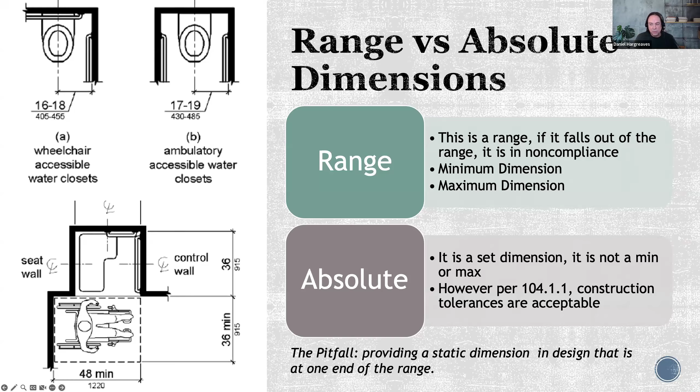So the next part is clearances and reach ranges. You can see when one organization's work conflicts with another - an existing accessible ramp, curb ramp - and the city at some point said we need parking meters every 20 feet, and it landed right in the middle of the ramp. So post-construction changes can also create a challenge.

But let's talk about those clearances. First off would be your clear floor space. Now I'm basing these on the ADA. Any of you familiar with the latest ANSI? They are increasing some of these numbers, and I do have another presentation on that. But for now, this is the US civil law, and these are your minimums.

So you can see here, your clear floor space, when your wheelchair isn't moving, is 30 inches by 48. And then objects above 27 inches can't extend out from the wall greater than 4 inches.

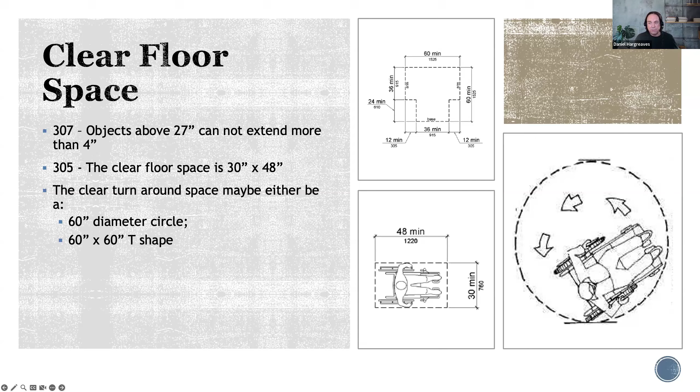So the idea there is if you're tapping with a cane, anything 27 inches and below, at any projection - so think 2 feet high, something that sticks out a foot - a cane would tap it and they would be able to walk around it. Because always remember, we see a lot of illustrations from the accessible symbol, a person in a wheelchair, to a lot of the graphics, people in wheelchairs, even the turnaround circle. A lot of that is what it's based on, but there are other disabilities that we're trying to capture, from hearing to visually impaired. And so all of those different elements are applied.

You can see here with that reach range, as we were kind of talking about, if something projects out - when you're in the wheelchair, you can see the front approach, you've got 15 inches to 48. And an older ADA, on the side approach, used to allow you to go to 54 inches, another 6 inches higher. But they've now changed that - it's all at 48 as the max for the top.

And one of the big pitfalls that I always catch on that in my own construction projects is thermostats. A lot of them are LED these days, and people want to mount them at about 5 to 5'4", which, you know, at a 4-foot high reach range is out of it, even though it works great for those that are standing to be able to see it correctly. So it's just one of those small elements that usually gets overlooked.

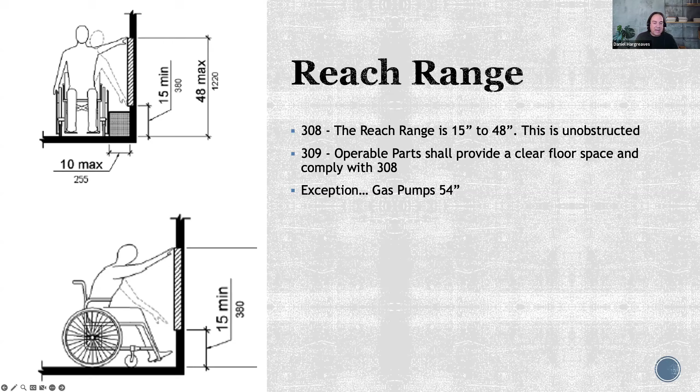And that's where 309 comes into play, saying the operable part shall be in the reach range, 15 inches to 48 inches. So if you had a thermostat where the buttons were at the bottom, mount that part at 48. A lot of times you'll see where they'll either center it or put the top of it not to exceed - it's just the operable part that matters.

And like any other good code reference law, there's an exception, and that's gas pumps. From a safety standpoint, they've found the lowest to be able to put a gas pump is 54 inches above the ground. And so they actually get to be outside of that reach range.

So let's kind of talk about parking once again. One organization, i.e. the electric company, wanted their pole right there, and they cut a new hole in an existing parking spot. So always have those coordinated.

This is an interesting topic, van versus standard spaces. And you'll see in the code, if you only have one space for your parking, it should be a van space. Van is wider than a typical space - that's 132 inches or 11 feet wide. And then a standard parking space is 96 or 8 feet wide.

The reason being is a lot of vans on that side door will have a lift. So the person in a wheelchair may get out of the driver's chair, wheel back, and then get out on the side of the van. So that's why the extra width there.

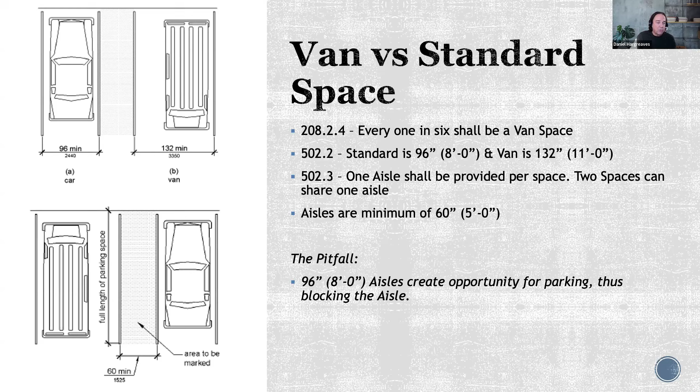One of the things to remember about both the standards with the illustrations, they have a disclaimer in the application that the illustrations are for reference only, but the written part of the code is what's enforceable. So the graphics are good, but especially in the older standard, there were some conflicts between the graphic part of it and the written part. So I always go back to deciphering what's written.

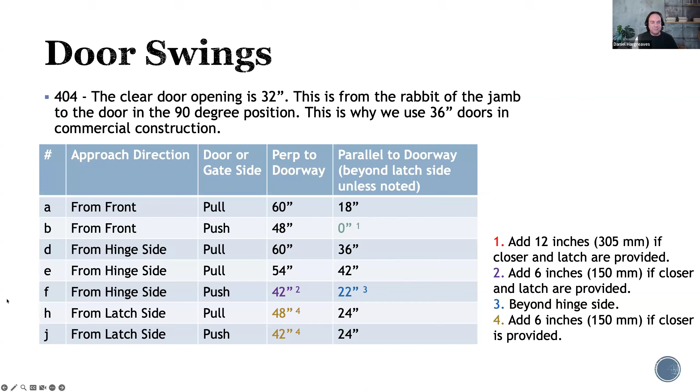The next slide will really show those different approaches to the door. And these are the same illustrations you find in ANSI or the ADA standard. And you can see right there on a front approach, 18 inches. And the idea is that clear space covers the wheelchair, lets you maneuver, lets you crack the door open and back up and move forward and so forth, and that's how you can progress through the opening with the door there. From a front approach, it makes perfect sense that you can roll right up to the door, turn the handle, and keep on rolling right through.

So the idea with that latch and closer, and that's this illustration with the red around it, is that door will keep closing and latching before the person can move forward. So that extra 12 inches lets them get the wheelchair at an angle, and then they can unlatch it and use the kick plate to hold it open for a second and then finish getting through the door.

And then also, once again, whether you're approaching on the hinge side, and a lot of these conditions may be where the door falls in the room, or on the strike side, you'll have those different clearances really depending on the approach. And once again, as I noted before, the pitfall is either caught or overlooked. You do a front approach with the clear 36 inches and you've got a latch and a closer, and that 12-inch clearance to the side has been missed.

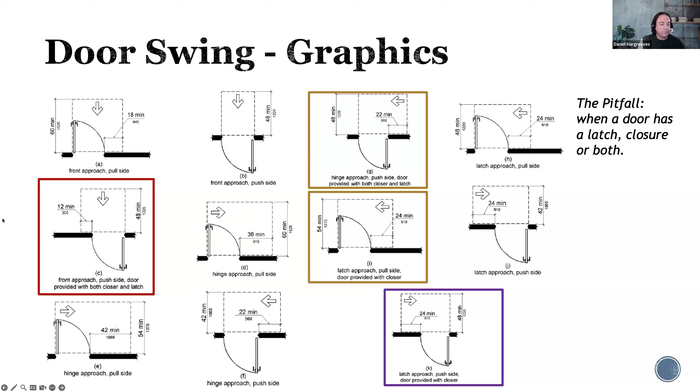So some of the other elements of a door that can help, and that's identified in the ADA, the closing speed of the door. If you've got a closer on it, that last 5 seconds, you actually have to hold that door at 12 degrees. On all your interior doors, you need a pull force of 5 pounds. And ironically, a fishing scale works great for that. And there are accessible tools also for pushing and pulling on doors to see what that force is.

But that of a storefront door, if you have a narrow or even a medium stile that's under 10 inches, you've got a little lip there, or maybe even more of a classic raised panel door. The reason for the 10 inches: that foot pedal on a wheelchair can get caught on that lip, and then the person can't get through the door.

And then vision light. And this is always one of those things. Not every door has to have a vision light; a lot of times you want it to prevent accidents. Maybe it's a high traffic door in a corridor, or between an office space or something. If provided, the bottom sill of that is 43 inches. And I always recommend when you do that, make sure you coordinate the bottom sill of that vision light of the door with the hardware.

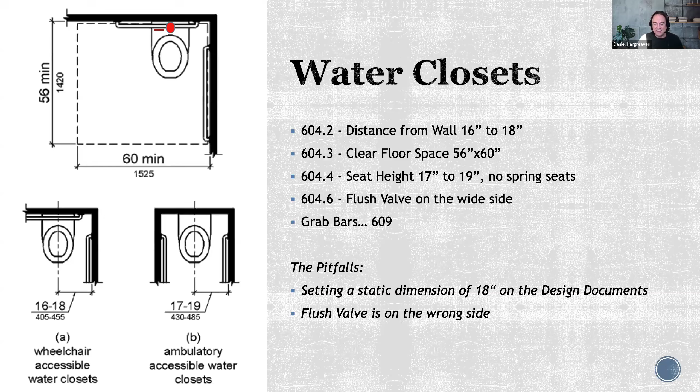And you can put the range in there too. A lot of times if you're working with Revit, or even CAD for that matter, it's a static number that they give you. So I always recommend just pick that static number.

The grab bars at your water closet, you've got the sidewall. So you need a 42-inch bar, and then the minimum distance to the leading edge is 54 inches. And then also at the same time, the maximum distance from the corner is 12 inches. So you can actually use a longer bar than 42 inches. And you can exceed those. You can be closer to the wall than the 12. You could be all the way down at 6.

But then also remember, if you do that, then you need a 48-inch long grab bar to make sure you hit that 54. So take all those dimensions into consideration: the length of the bar, how far it could be from the corner, the maximum distance from the corner. The back wall is a little different, and this one has changed from the previous. It used to be a static 6 inches from the inside corner, but now that they've put water closets in a tolerance, it's now based on the center of the water closet.

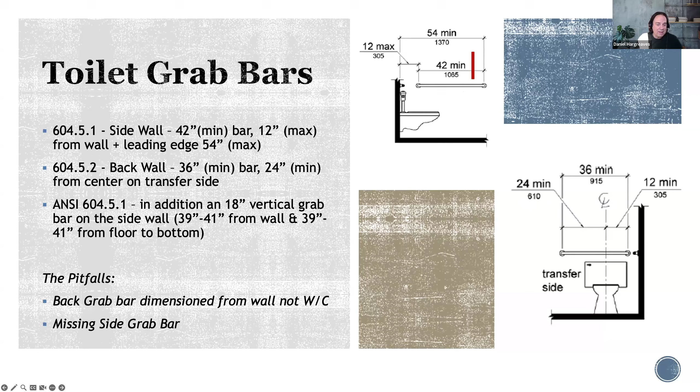And then, as I started to talk about earlier, the two major pitfalls: that back grab bar is measured from the corner of the wall, not the center of the water closet. And then if you do fall under the ICC or IBC for your code, that side grab bar is missing, because the only standard you looked at was the ADA. So that's a pretty common missed item, that side grab bar, because ADA doesn't have any language related to it.

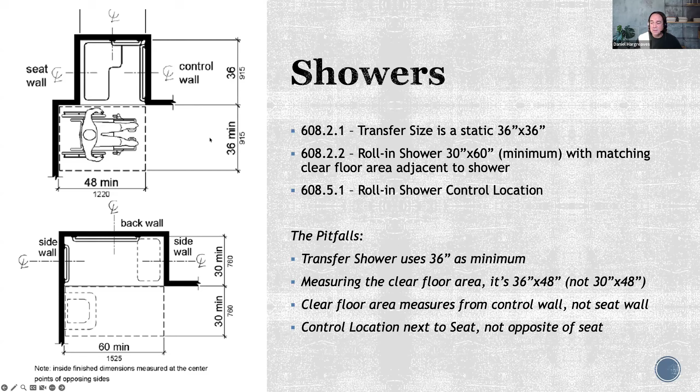Kitchens versus break rooms. Kitchens and kitchenettes are identified in 804. The exception: it is not a kitchen if you do not have a cooktop or a conventional range. That is the main difference. Once it becomes a break room or kitchenette, you don't fall under a lot of the same requirements of a kitchen. And once again, the major pitfall of that difference is that 30-inch workspace. You need an additional knee space for that, which in a kitchenette or break room you don't need. You're allowed that parallel approach.

Kitchen clearances are measured from the counter, not the appliance faces. Basically what that's illustrating: your range usually extends out the width of the handle or the door beyond that 24-inch counter. And if you swing back to those clearance requirements, if you have 24-inch base cabinets and you want the backsplash and the lip, you may have a 25-inch countertop. The problem is a 25-inch countertop exceeds what you're allowed for that reach range. So always keep in mind that projection beyond the counter face.

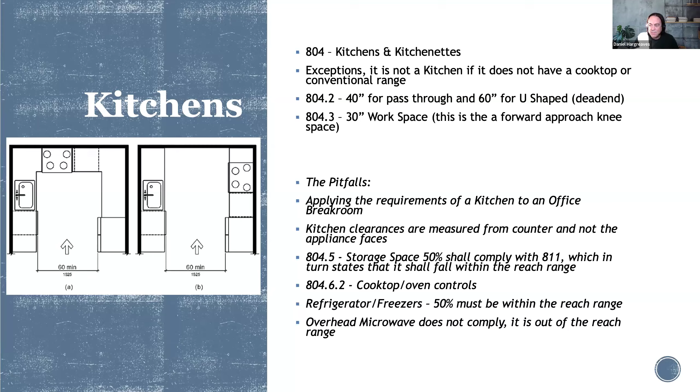And then the last one is a microwave hood over the range. It doesn't comply. So if it is a kitchen and you're having to provide a microwave, you need to either put it on the counter or a lower cabinet in the countertop.

Signage is kind of interesting, and I read in the news that the U.S. State Department is changing, which is kind of in violation of accessible signage, all standard fonts from a sans serif to a serif font, Times Roman. That's actually a pitfall in your signage. So the U.S. State Department is going to be in non-compliance with their own laws. So just keep an eye out for that.

But if you have a static word on your sign, office, in this case library, area of refuge, you have to also provide the Braille. There's standards for the grade 2 Braille, but if it's one of those signs where maybe it's just a static number and then you have an open paper slot to put the person's name in, you don't have to change the Braille out for that because you've already identified it by a room number, and the number would be in Braille.

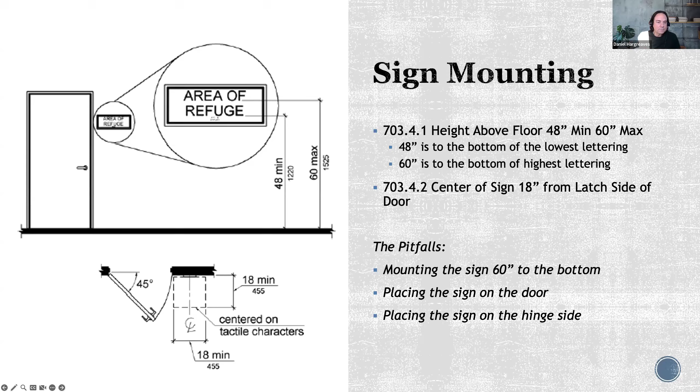And of course, if you can catch your pitfalls in your design, the good news is we get to head to the left for success. If you're following what you think is the correct approach and not back-checking all of those different codes from local ordinances to states to ADA, I always hate to say it, but without catching those pitfalls, you're not going down the right path.

And with that, there's my old contact information. Some of the resources that I pulled all this information from: the access-board.gov, that's a great place for the standards. And then of course there's Title 24, and the Texas Accessibility Standard.

As I said, there's about 30 different states now that have some sort of accessibility requirements. Check your state, check your local ordinances, check your laws to make sure that they haven't added something that may not be in the ADA.

And with that, the downstairs toilet is closed, so please use the upstairs one. And there is no elevator.

Thank you, Daniel. There is one question that was posted. It says, I see the 5-pound pull force on the interior doors. If there's a pull force requirement, is there a pull force requirement for exterior doors? There is not. It's actually an exception to it.